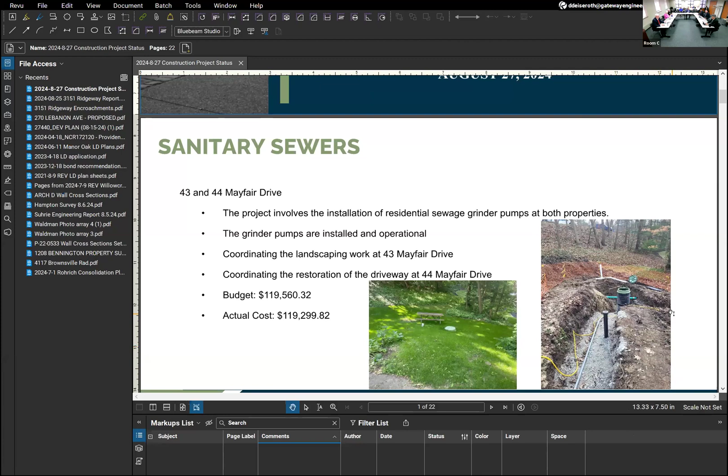To kick it off, on sanitary sewers, if you recall, we had to go ahead and do some connection of 43 and 44 Mayfair Drive as part of a settlement on a matter to connect them into our sanitary sewer. We had to put grinder pumps in and do a bunch of restoration. It was a complicated little project. It's complete at this point, and it came in at budget.

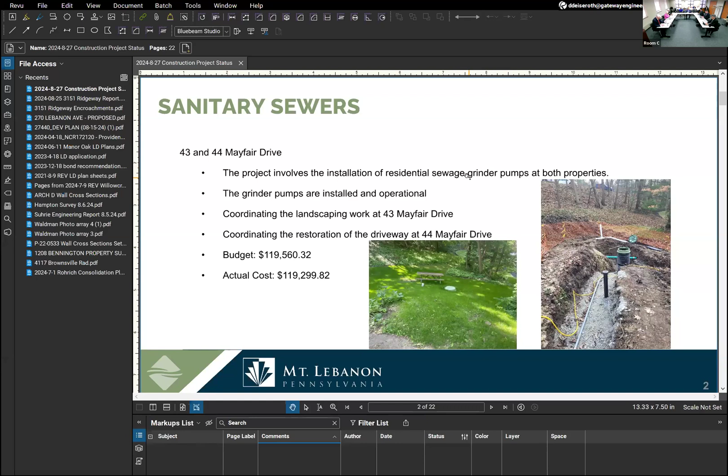The contractor that did the pump work was very good. There's a driveway to be completed, but I believe that's already been done at this time, so we're just wrapping this one up. It was a combination of taking quotes related to the pumps, and then we were able to do other work out of the point repair contract. So we used multiple contractors on this one, and it went pretty well. As usual, anytime you're digging in people's yards, there's restorations, driveway repairs, all those types of things.

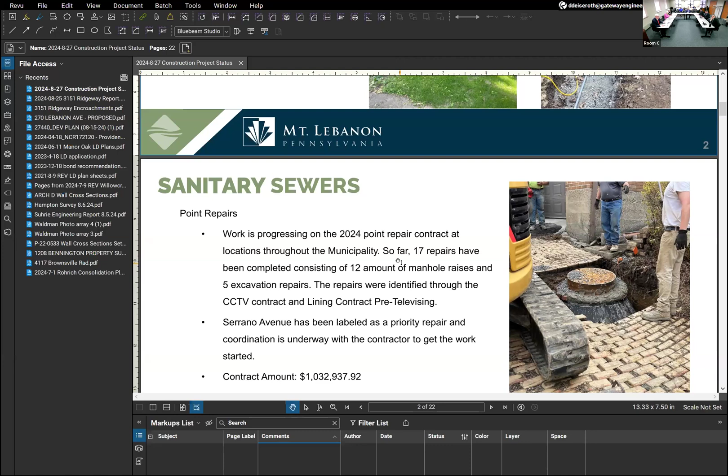Point repairs, here's a nice picture of point repairs where we actually go in and could be raising manholes or replacing small pieces of pipe. If the commission recalls, we have a big multi-year contract related to this, a $1 million contract, and we're going to complete this year's work at about $250,000. Point repairs have continued to decrease.

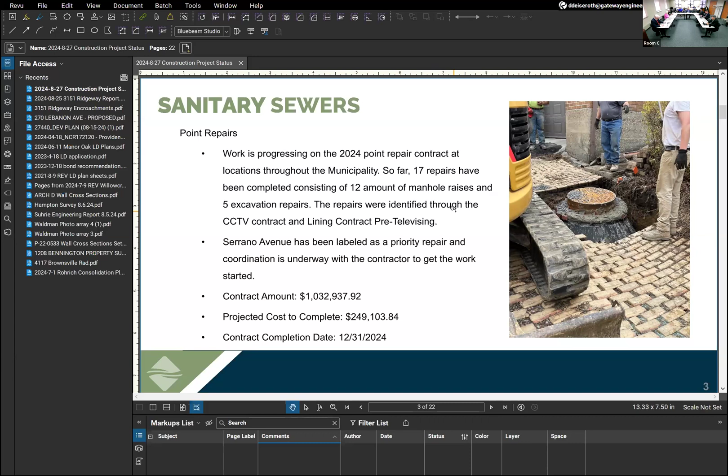The reason is we do continued maintenance every year and keep biting off the things that need to be done. We always find things you never think you're gonna find, but fortunately we have this contract to handle that. We hope it continues to come down because we're doing other things like lining sewers, which is the next part.

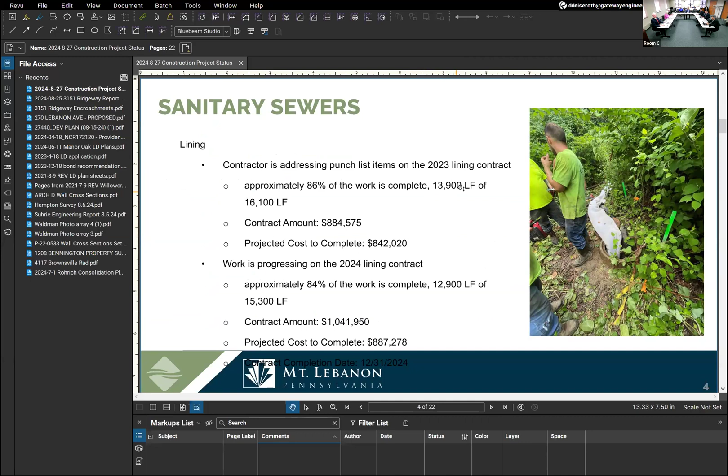I was trying to figure out, we're roughly about 15 miles lined so far, give or take. In 2023 we wrapped up about another 3 miles, and another 3 miles here this year in 2024. So we'll be over 20 miles of a 150-mile system, biting off roughly 2% of our system every year. We're getting it lined, which is basically rebuilding your sanitary sewer system from within. So I think those projects are going well.

What I failed to say at the beginning of the presentation is that contractors are a little bit more back to normal this year. Prices haven't come down, but they've stabilized, and they're able to get the work done, at least for the most part, within schedule. So the problems we were seeing post-pandemic seem to be better. I wouldn't say it's great, but it's better.

That's 2% of the system per year. We're roughly a 150-mile system, so if we do 3 miles a year, long term that's 50 years, and we already have 20 miles in. Well, but in another 30 years, go back to the beginning and start over. We're putting in PVC pipes now. I recognize that, but my instinct is just hearing that it's budget this number every year, in perpetuity, knowing that that's just the way it has to be fixed. All right, it's helpful to have that context. Plus X%.

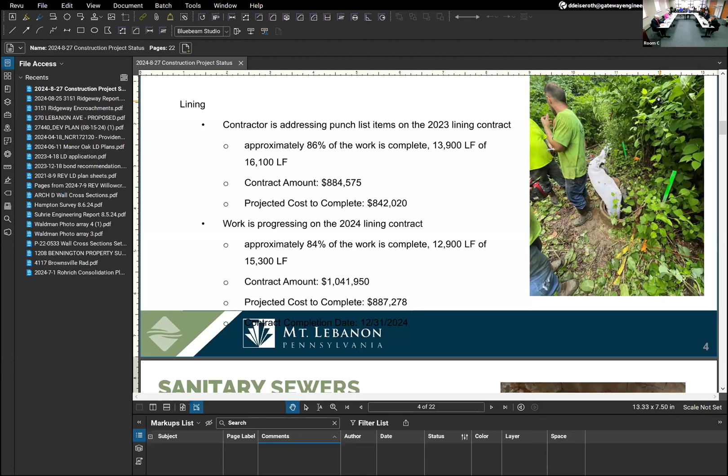In 2024, moving on to the next part of what we do to the sewer system, we have about 5,000 manholes. We're doing roughly 5% of those per year. We're actually going in and doing the cementitious coating of old brick manholes that are leaky, fixing up the inverts, putting in steps so guys can get down inside them, sealing off the chimneys to them. So there's various work that goes on.

That's about a $470,000 contract. Again, this is coming in right at about budget. We know more about this, how much we're doing. We inspect the manholes beforehand, get this work done. This is all part of the maintenance plan.

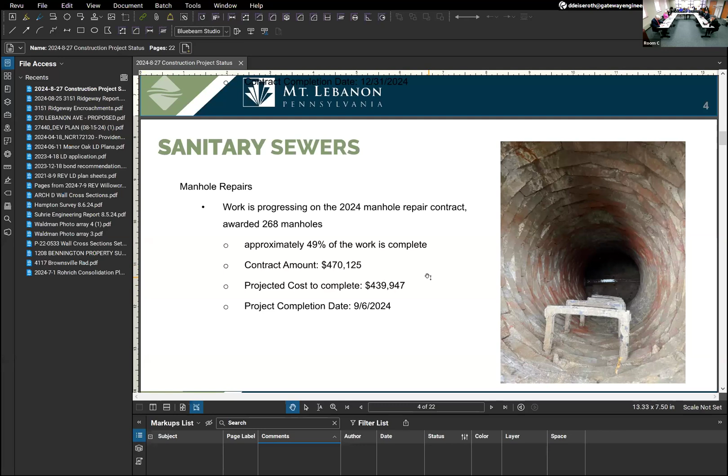Continuing on with sanitary sewers, we also do lining, televising to know what type of repairs we need to get done. So on average, we're televising — at least this year, in 2024, we're doing about 25 miles of actual inspections. We're having the contractor both do the internal televising of the sewers and also the manhole inspections. It's relatively cheap to do, but again, we try to get through the system and make sure we find all these things out. This is where we do the investigative work. We find out what's going on, and that falls into the other repair contracts from there.

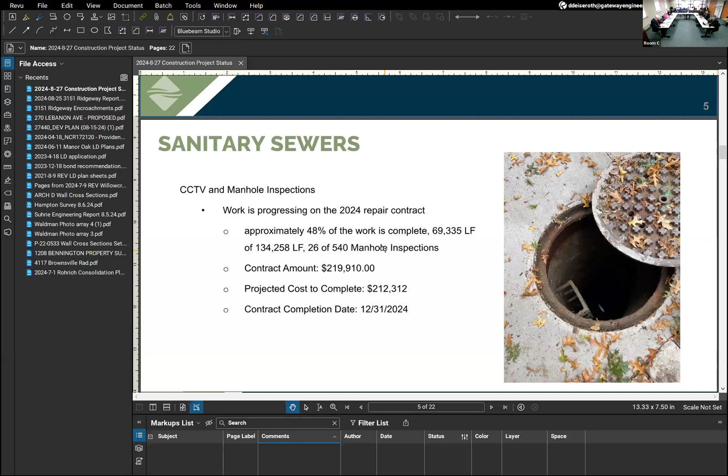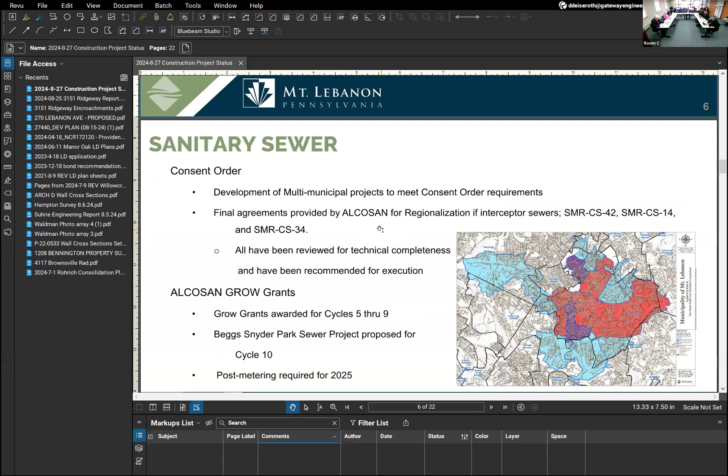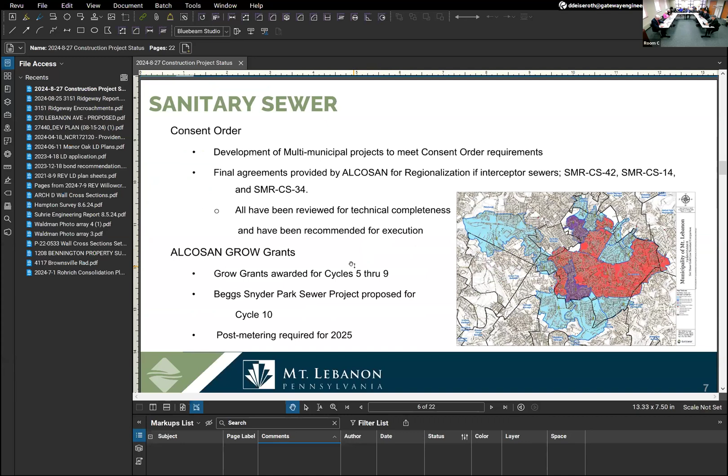Moving onward, we just threw out there the consent order. We have another big deadline coming up next month to get our reports in for further review of where we're going to do the Gold Line Standard projects. That's going in and will be reviewed by the regulators. We're also continuing to apply for GROW grants. There's still money available for Cycle 10, so stay posted on that. We hope to get more money back for our projects where we're doing the work.

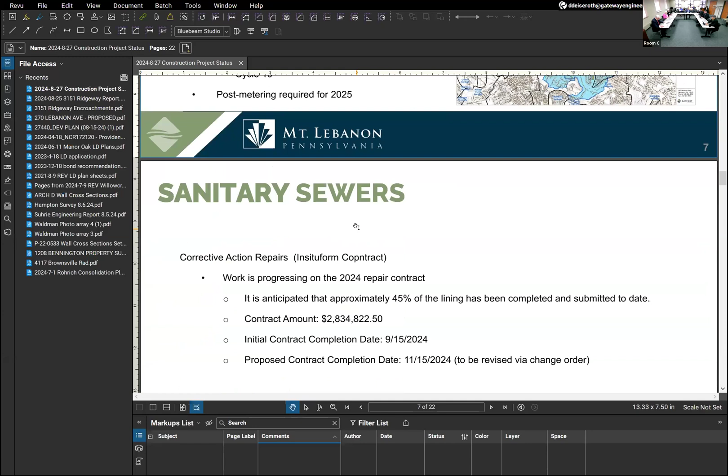Moving onward to the one big contract the commission awarded this year — if you recall, our first big Gold Line Standard project, which we gave to Insituform. This project's moving along okay. It's been a little bumpy out of the gate with the contractor, getting them oriented and on task, but that seems to be going well now. We're at about 45% of the lining done. We're also really trying to button up the sewers by putting mechanical end connections where pipes come into manholes — that's part of their work, so they'll continue on with this. We're thinking they'll wrap this up by the end of the year. That's the anticipation, so it's going much better, and we're much happier with what's happening there.

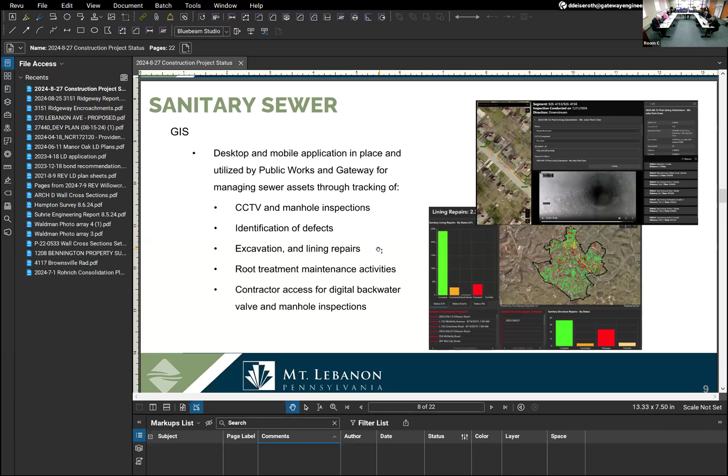Public Works and our guys have been taking on and continually improving the GIS system, at least the mobile functions related to that. So we're getting a lot of that stuff out in the field, so people can go out in the field and, when there are issues where they're working on sewers, actually know what's going on and don't have to call back in for that. It's a great tool. We continue to try to use the system to its fullest potential — Rudy's a big advocate of that, and we'll continue to try to make that better.

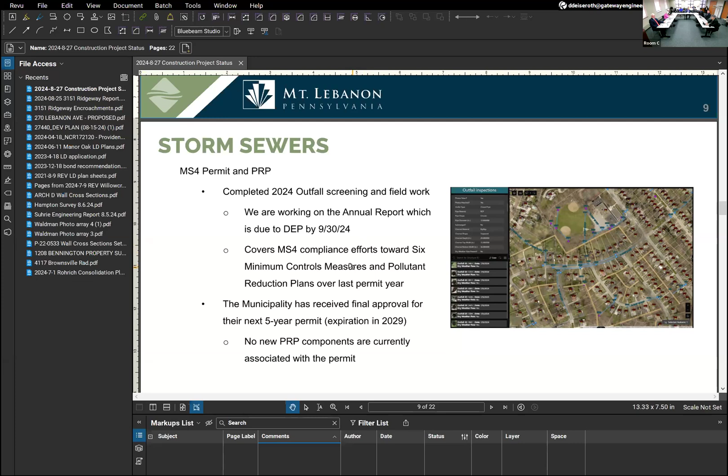MS4 work — we're continuing to do the outfall screening that's required annually, to measure where our streams are discharging into the bigger streams, or our sewers are discharging into the water courses in the municipality. We've received final approval for the next 5 years of our NPDES permit. There's nothing other than the normal minimum controls required right now, so no further updates on the PRP components — we're pretty much complete with what we had to do during the first cycle of that. So again, nothing more on that. Hopefully we can then focus our efforts on storm sewers, completing the list of things that are out there, the work that's on the books that needs to be done.

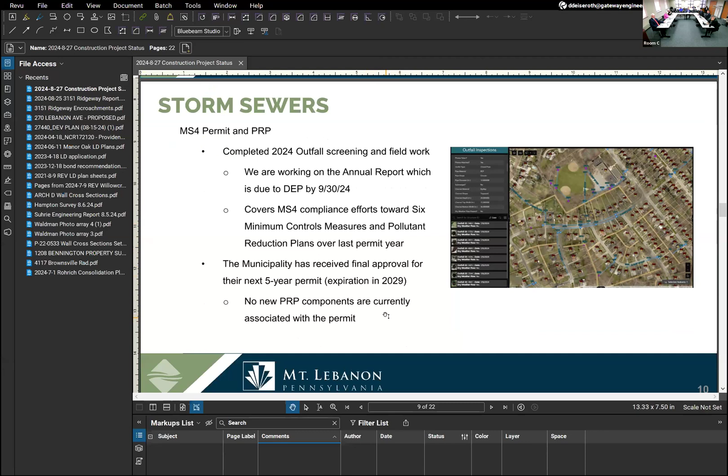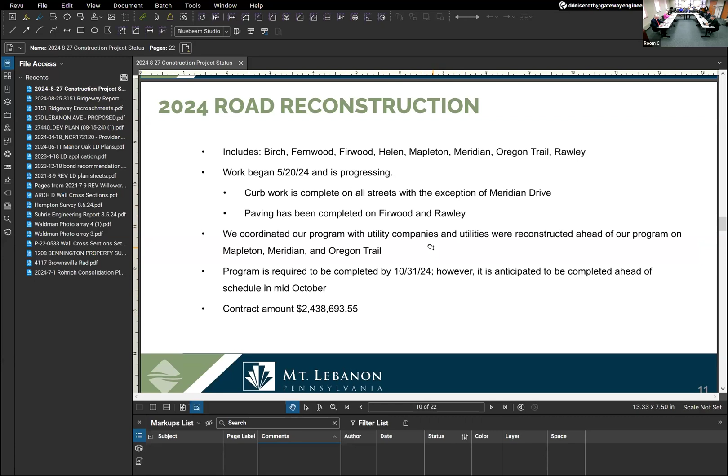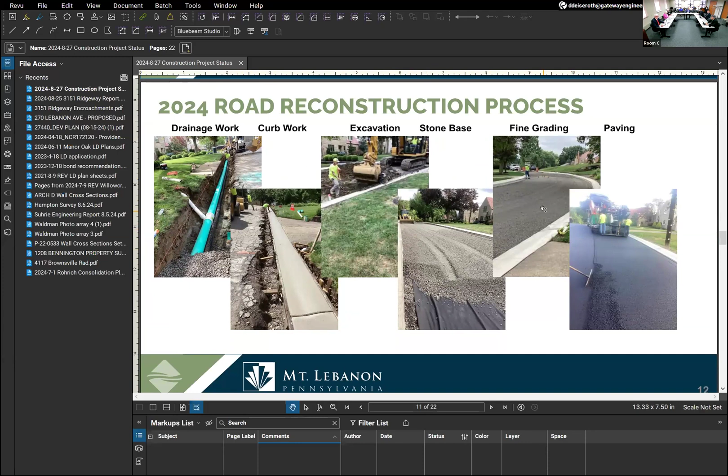As you recall, the process involves drainage work, then curb work, then excavation, then backfilling with aggregate, and finally paving. So that's the multi-step process. The schedule is continually updated and things are going well.

On the mill and overlay project, that project was completed on 8/13. They did milling work and also had to do ramp work on handicap ramps, updating any ramps that needed updating as that happens. That project was completed within budget, and we got it done before school started. So that's good.

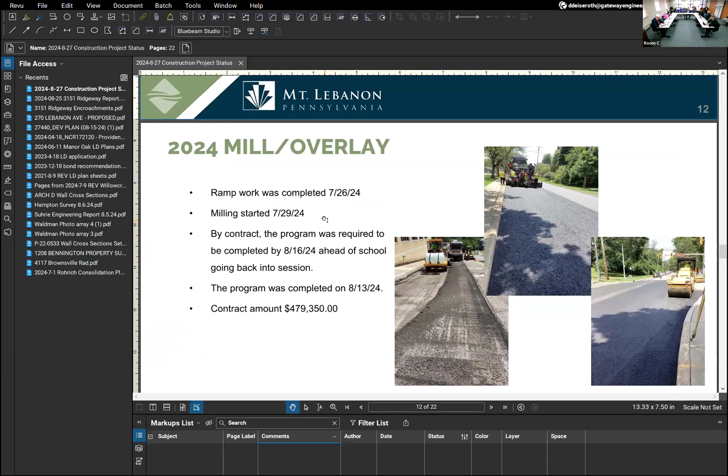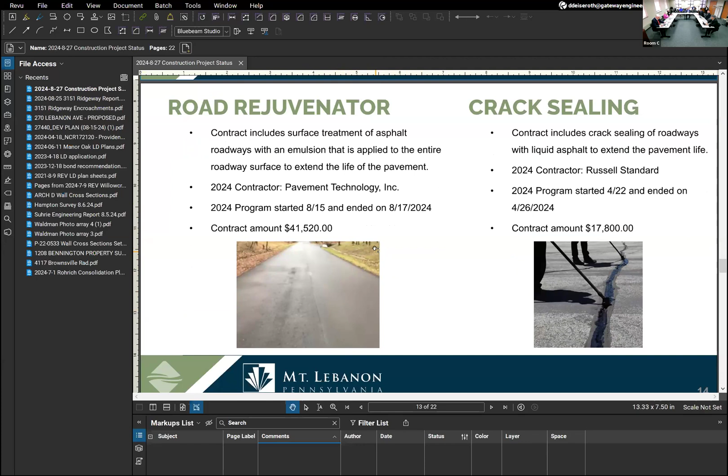Road Rejuvenator, that project is also completed. That's a short process where we go out and treat streets that are already in good condition to extend their useful life. That program's been going on for many years, and we think it does a great job of rejuvenating the surface of the asphalt because the sun continues to degrade it very quickly.

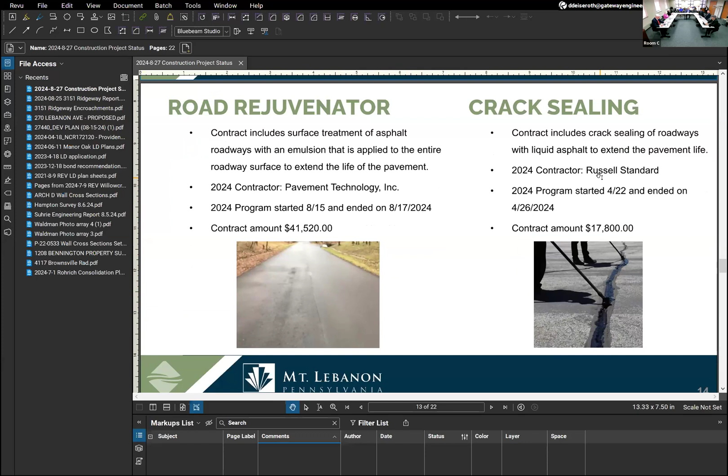Bituminous pavements have minimum oil amounts in them right now, so we have to go back and make sure the top stays nice and tight so we don't get cracks in the road. But when we do have cracks, we do a crack sealing program. That one was completed early on in the year.

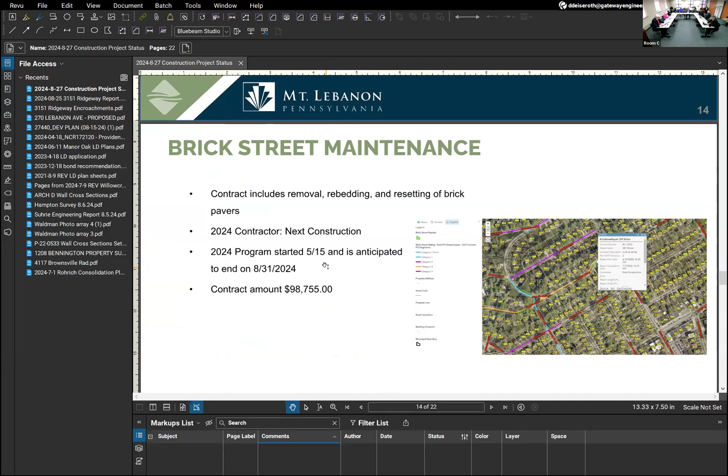Complete, no issues. Brick maintenance is still going on right now. We continue to ramp that up a little bit more each year. Rudy has that work going on, and I think we're going to finish sometime here in early September.

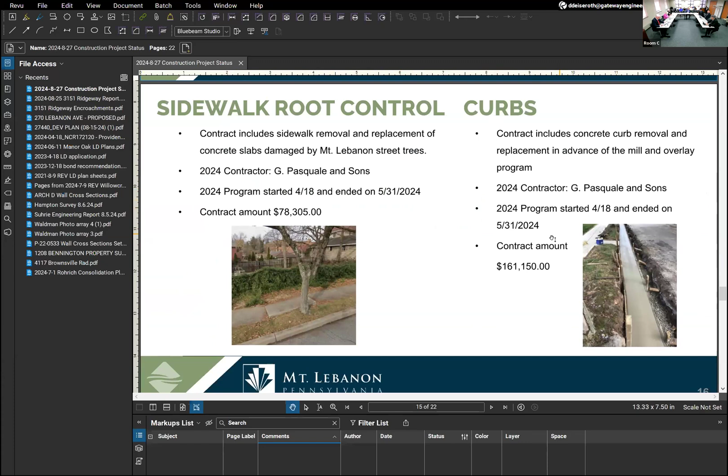We also did root control and curb work. Those two contracts were started and ended pretty quickly this year, in the amounts prescribed within the budget. Nothing particularly to report on there.

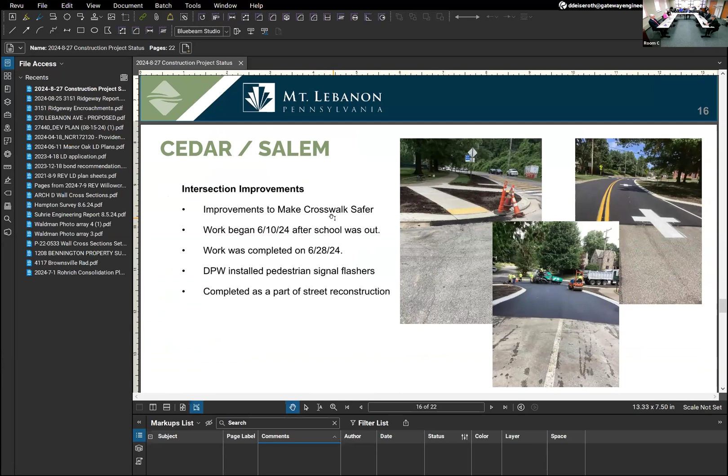And then we got our Cedar Salem intersection project done. I think it turned out pretty well. The big lesson learned was that we bid it during the road reconstruction project, so we got good numbers and got it in early. For any future projects like that, I highly recommend the same approach.

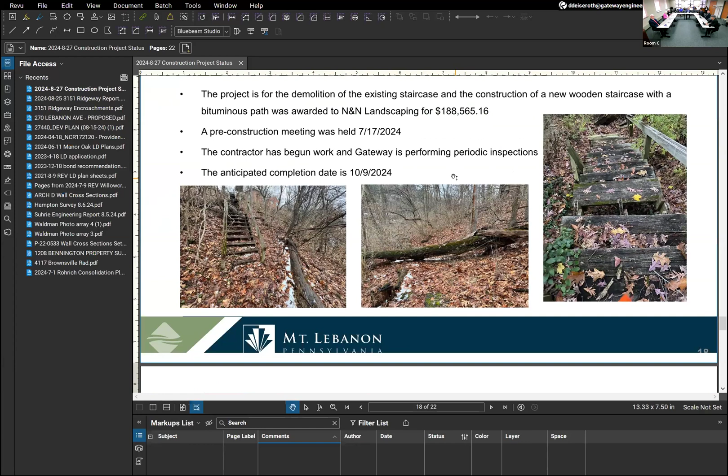Right now the Timber Creek stairs are being worked on. The contractor seems to be doing pretty well. We had a pre-construction meeting with them in July. They're anticipated to be completed here in October. Nothing special to report other than we had a tree down, which Public Works took care of this week.

Can I ask a question on that? Sure. I've not heard any complaints from the residents so far, so I think that's a good sign.

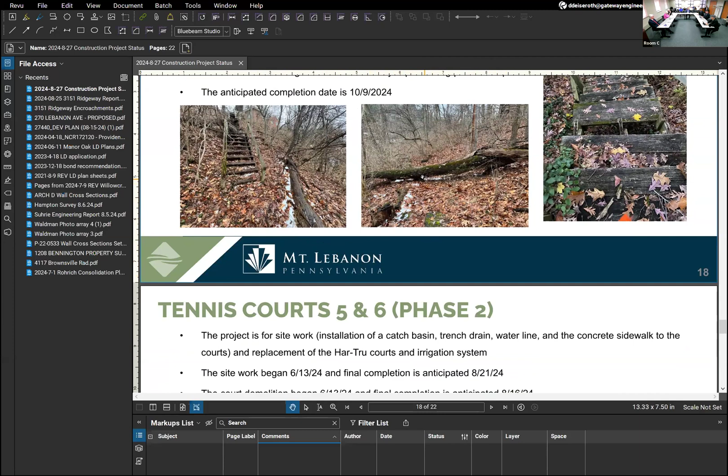So far, actually, it's more pointed toward Rudy—once those steps are in, maintaining them, salting them, whatever it might be to make sure they're passable, given that they're a public right of way maintained by the municipality. How are we thinking about that?

We'll have to add that into our contractual sidewalk and step snow and ice program. Thank you.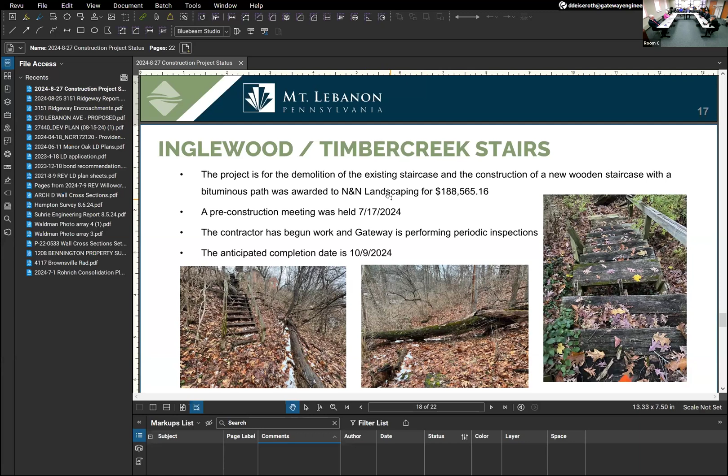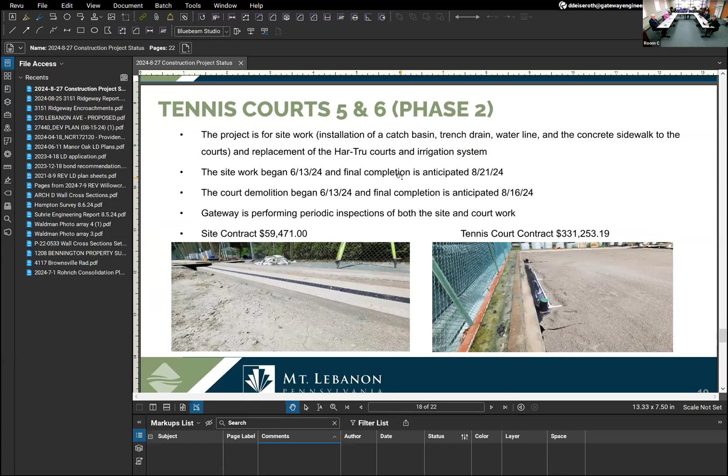Then we also got the tennis court work done, which is always a challenge getting guys used to working in country clubs to come do municipal projects. But fortunately things worked out, and we had a site contractor do part of the work. We had the electrical work done last year, Har-Tru came in and completed their work, and now the site contractor has to finish up some more concrete and we'll be out of there.

And then the south garage repairs—the first step was to jump in and do some work on the bridge that goes from Washington Road back to the garage. They did a membrane, a lot of chipping and sealing and work. Mariani and Richards did that work, and at this time I'd say they are complete. As I understand it, we talked today at Public Works, and they're pretty much wrapped up.

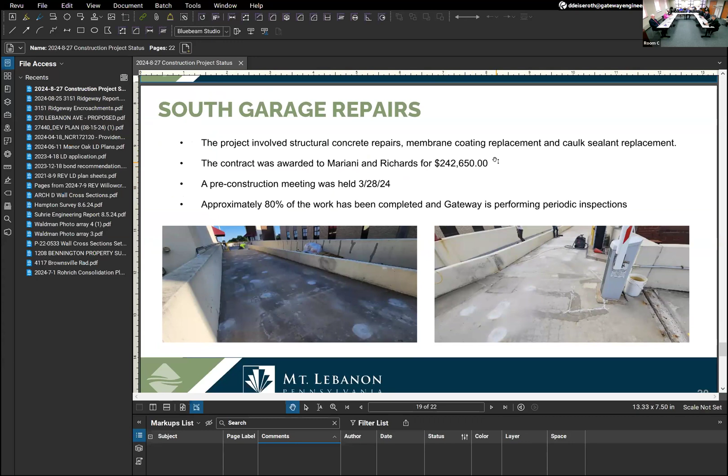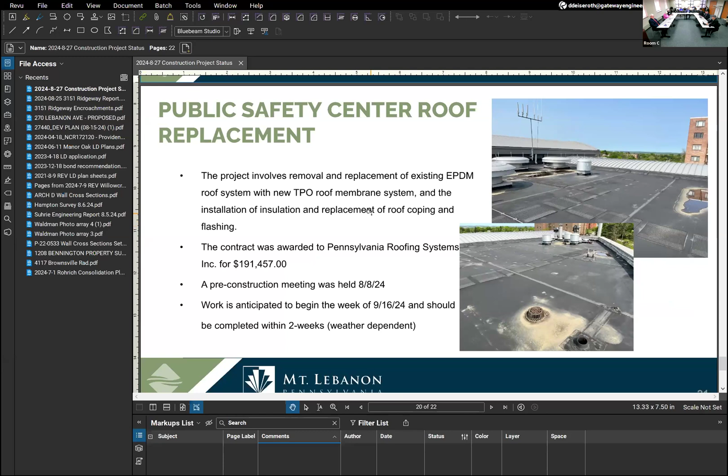Public Safety Center roof replacement was awarded to PA Roofing Systems. Pre-construction in August, with work anticipated here in mid-September. It'll just take a couple weeks once materials are all available to arrive and be on site.

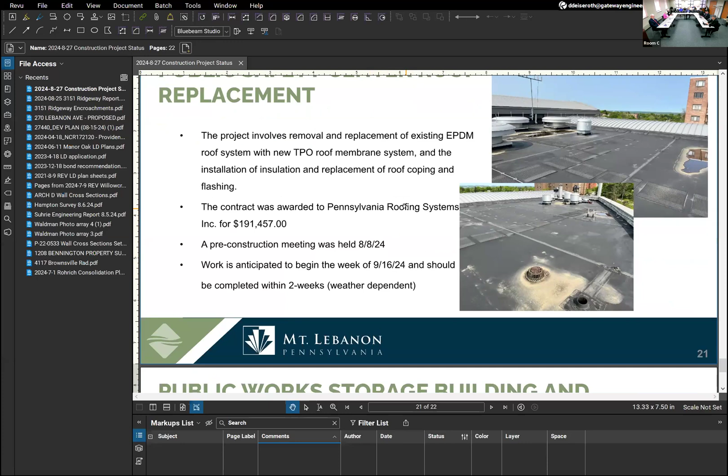We also have the Public Works Storage Building and Fire Training Center project, which was awarded to DeMarco. They have all the foundation work done and the preparation ready to go, just waiting on the building to arrive. And we're still waiting on the Fire Training Center part of the grant application, so we'll be ready for that.

That's it, it's a lot, but things have, at least in my estimation, gone pretty well, with some contractors at least getting back to a little bit more normal. That's it, any questions, commissioners?

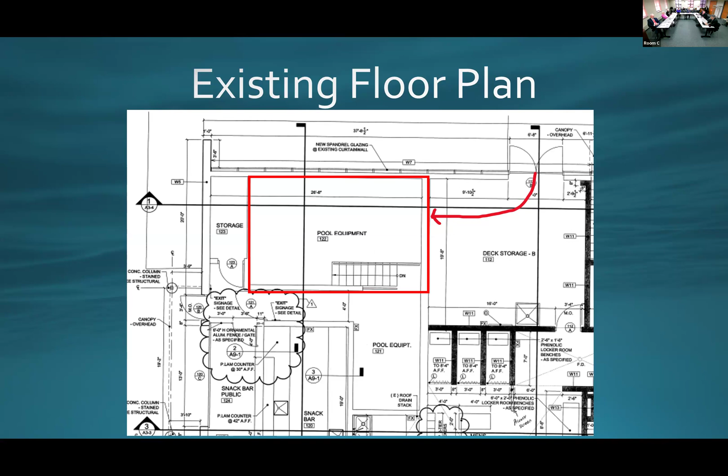They would also bring the current circulation system for the spray features, which is located under the deck in a vault pit underground, very difficult to access, into the filter room proper, to make life a lot easier to maintain.

Also included in this work would be a new surge tank. This would be constructed exterior to the building, underground, under the deck in the area identified, as what we're currently thinking. As well as a water level controller—an automated way to control water level rather than just turning a valve and hoping no one forgets—and a new chemical controller.

These were the very high priority items identified both internally and by the consultant. Other items like leveling the floor and gutters would be addressed at a later time, not in this phase. We still hope to have the builder of the pool on site in the fall, and potentially cut and weld the current floor flat, which would at least get us a few years of a flat floor.

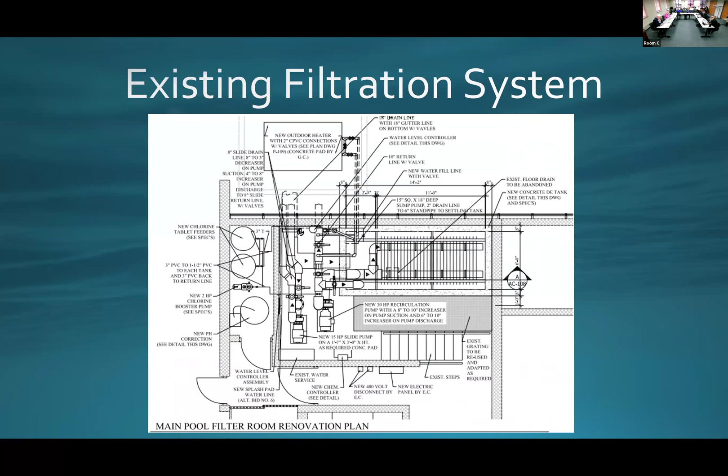If you go back to the picture, one more, no, go back where we just were. Okay, yeah, oh, there. So you're ripping stuff out. You're taking the pad out. No, that whole area just identifies as the location, right? That red is just the general area.

The corner of the building that's in there, that's the filter room and the edge of the storage room where you would come in and out. That's where the work is gonna happen, but the rest of that deck area is prime location for a surge tank, so some of that deck will very likely be ripped up and a big hole dug.

You say a surge tank, what do you mean? A surge tank is a vessel that collects extra water when you get an influx of bathers. You put 1,000 people in the pool, the water has to go somewhere. Currently there is nowhere for it to go because we have undersized gutters. Gutters could normally take some of that, but not big. Any new pool is built with a surge tank, that's just standard design.

We just don't have one. Right, never have. Plus we're relocating some of the stuff that's under there for the spray stuff. The pipes are gonna be coming through that area, on the left side of the red rectangle. That's where the pool pipes return to the filter room.